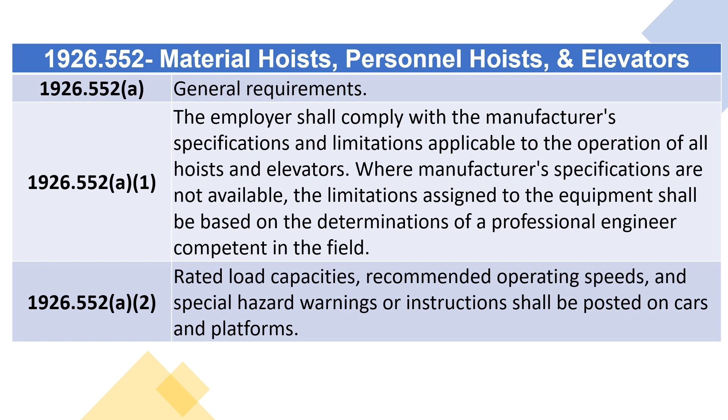1926.552(a)(2) Rated load capacities, recommended operating speeds, and special hazard warnings or instructions shall be posted on cars and platforms. 1926.552(a)(3) Wire rope shall be removed from service when any of the following conditions exists. 1926.552(a)(3)(i) through 1926.552(a)(3)(iv).

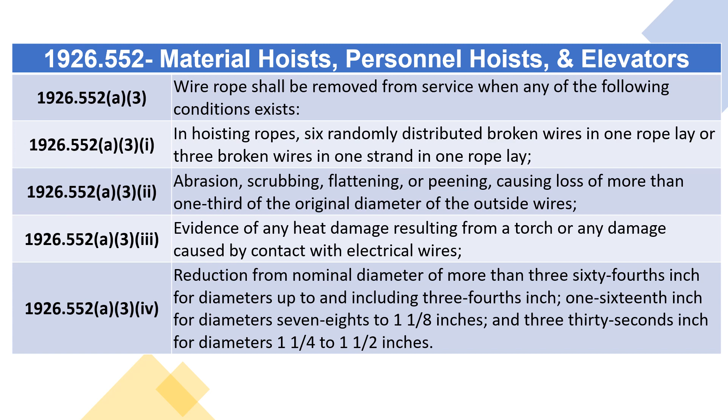In hoisting ropes, 6 randomly distributed broken wires in one rope lay or 3 broken wires in one strand in one rope lay. Abrasion, scrubbing, flattening, or peening, causing loss of more than 1/3 of the original diameter of the outside wires. Evidence of any heat damage resulting from a torch or any damage caused by contact with electrical wires. Reduction from nominal diameter of more than 3/64 inch for diameters up to and including 3/4 inch, 1/16 inch for diameters 7/8 to 1 1/8 inches, and 3/32 inch for diameters 1 1/4 to 1 1/2 inches.

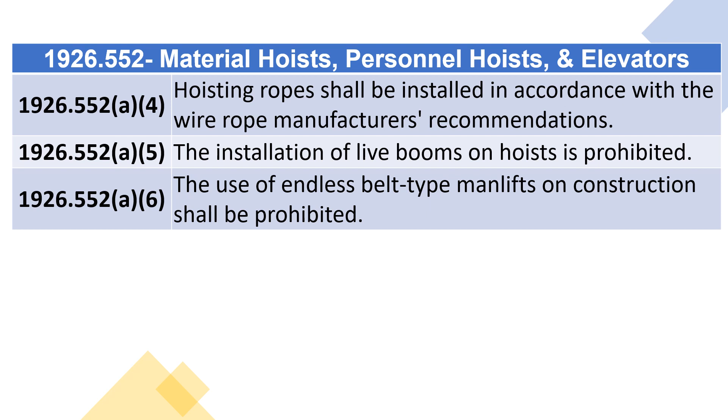1926.552(a)(4) Hoisting ropes shall be installed in accordance with the wire rope manufacturer's recommendations. 1926.552(a)(5) The installation of live booms on hoists is prohibited. 1926.552(a)(6) The use of endless belt-type man lifts on construction shall be prohibited. 1926.552(b) Material hoists. 1926.552(b)(1).

1926.552(b)(1)(i) Operating rules shall be established and posted at the operator's station of the hoist. Such rules shall include signal system and allowable line speed for various loads. Rules and notices shall be posted on the car frame or crosshead in a conspicuous location, including the statement "No riders allowed." 1926.552(b)(1)(ii) No person shall be allowed to ride on material hoists except for the purposes of inspection and maintenance.

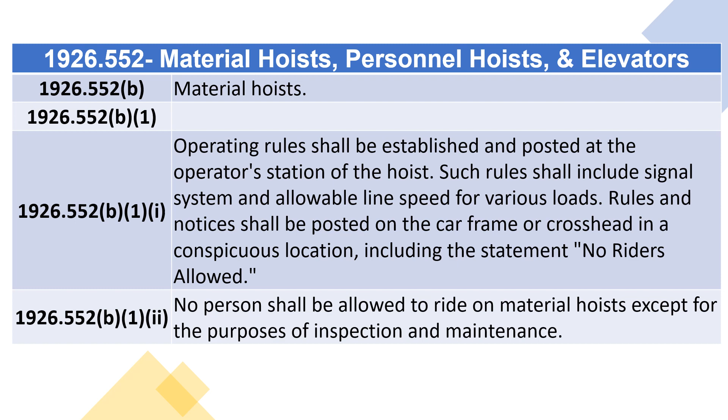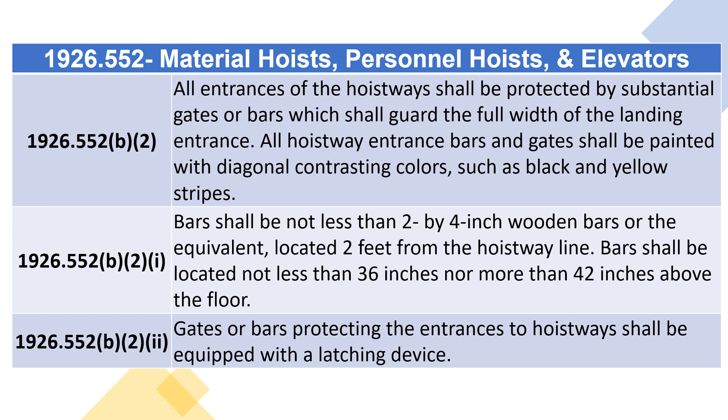1926.552(b)(2) All entrances of the hoistways shall be protected by substantial gates or bars which shall guard the full width of the landing entrance. All hoistway entrance bars and gates shall be painted with diagonal contrasting colors, such as black and yellow stripes. 1926.552(b)(2)(i) Bars shall be not less than 2 by 4 inch wooden bars or the equivalent, located 2 feet from the hoistway line. Bars shall be located not less than 36 inches nor more than 42 inches above the floor. 1926.552(b)(2)(ii) Gates or bars protecting the entrances to hoistways shall be equipped with a latching device.

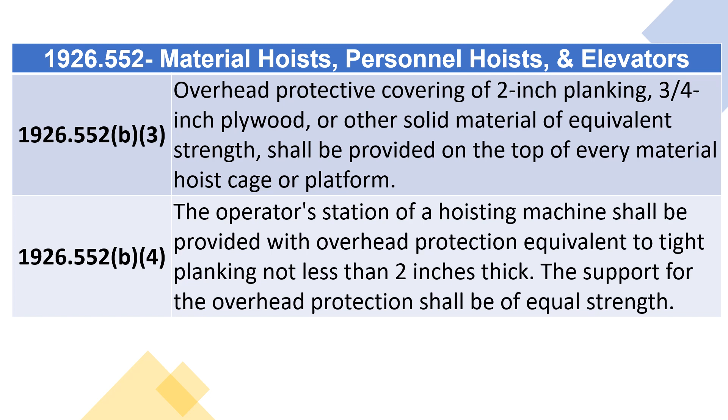1926.552(b)(3) Overhead protective covering of 2-inch planking, 3/4 inch plywood, or other solid material of equivalent strength, shall be provided on the top of every material hoist cage or platform. 1926.552(b)(4) The operator's station of a hoisting machine shall be provided with overhead protection equivalent to tight planking not less than 2 inches thick. The support for the overhead protection shall be of equal strength. 1926.552(b)(5) Hoist towers may be used with or without an enclosure on all sides. However, whichever alternative is chosen, the following applicable conditions shall be met.

1926.552(b)(5)(i) When a hoist tower is enclosed, it shall be enclosed on all sides for its entire height with a screen enclosure of 1/2 inch mesh, No. 18 U.S. Gauge wire or equivalent, except for landing access. 1926.552(b)(5)(ii) When a hoist tower is not enclosed, the hoist platform or car shall be totally enclosed, caged, on all sides for the full height between the floor and the overhead protective covering with 1/2 inch mesh of No. 14 U.S. Gauge wire or equivalent. The hoist platform enclosure shall include the required gates for loading and unloading. A 6-foot-high enclosure shall be provided on the unused sides of the hoist tower at ground level.

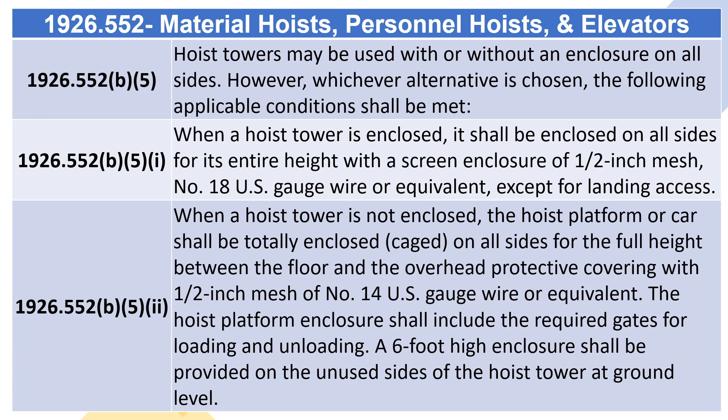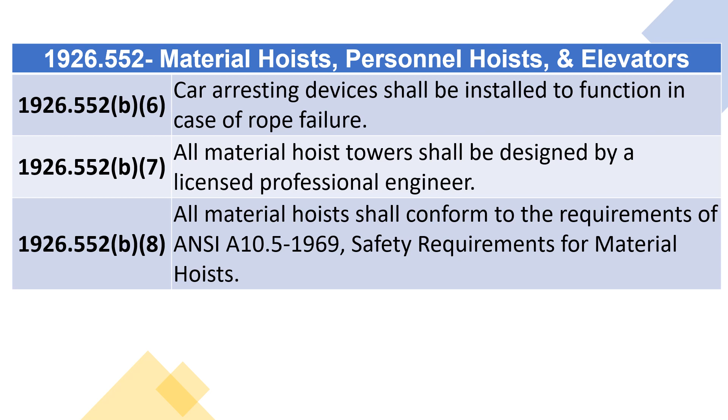1926.552(b)(6), car arresting devices shall be installed to function in case of rope failure. 1926.552(b)(7), all material hoist towers shall be designed by a licensed professional engineer. 1926.552(b)(8), all material hoists shall conform to the requirements of ANSI A10.5-1969, safety requirements for material hoists. 1926.552(c), personnel hoists.

1926.552(c)(1), hoist towers outside the structure shall be enclosed for the full height on the side or sides used for entrance and exit to the structure. At the lowest landing, the enclosure on the sides not used for exit or entrance to the structure shall be enclosed to a height of at least 10 feet. Other sides of the tower adjacent to floors or scaffold platforms shall be enclosed to a height of 10 feet above the level of such floors or scaffolds. 1926.552(c)(2), towers inside of structures shall be enclosed on all four sides throughout the full height.

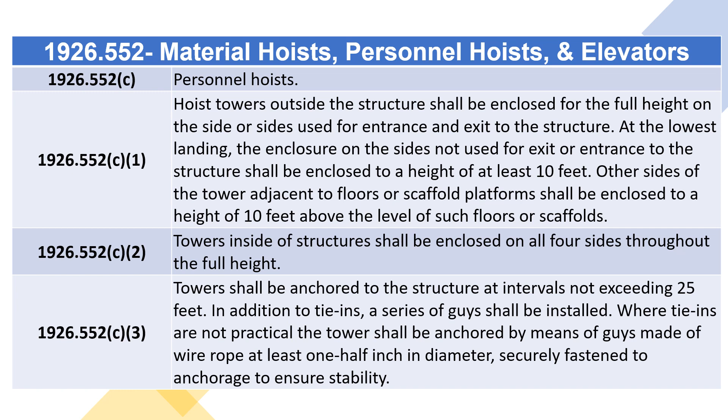1926.552(c)(3), towers shall be anchored to the structure at intervals not exceeding 25 feet. In addition to tie-ins, a series of guys shall be installed. Where tie-ins are not practical, the tower shall be anchored by means of guys made of wire rope at least 1/2 inch in diameter, securely fastened to anchorage to ensure stability. 1926.552(c)(4), hoistway doors or gates shall be not less than 6 feet 6 inches high and shall be provided with mechanical locks which cannot be operated from the landing side, and shall be accessible only to persons on the car.

1926.552(c)(5), cars shall be permanently enclosed on all sides and the top, except sides used for entrance and exit which have car gates or doors. 1926.552(c)(6), a door or gate shall be provided at each entrance to the car which shall protect the full width and height of the car entrance opening.

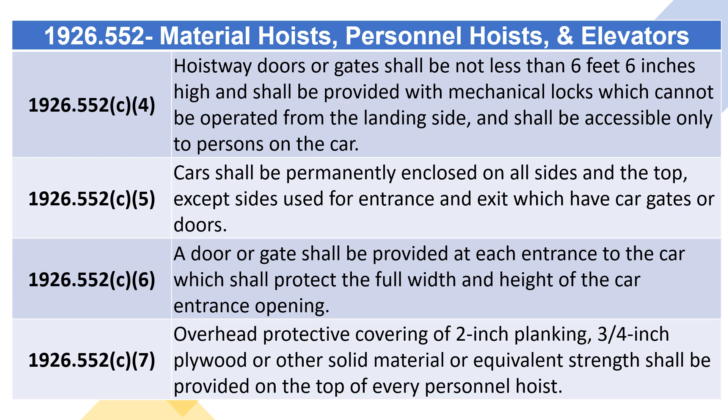1926.552(c)(7), overhead protective covering of 2-inch planking, 3/4 inch plywood or other solid material of equivalent strength shall be provided on the top of every personnel hoist. 1926.552(c)(8), doors or gates shall be provided with electric contacts which do not allow movement of the hoist when door or gate is open. 1926.552(c)(9), safeties shall be capable of stopping and holding the car and rated load when traveling at governor tripping speed.

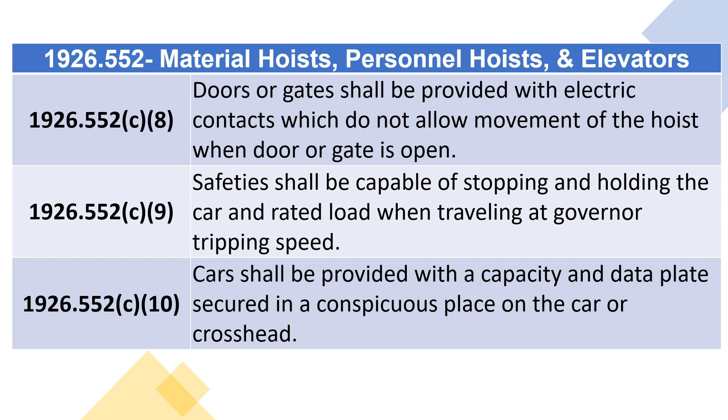1926.552(c)(10), cars shall be provided with a capacity and data plate secured in a conspicuous place on the car or crosshead. 1926.552(c)(11), internal combustion engines shall not be permitted for direct drive. 1926.552(c)(12), normal and final terminal stopping devices shall be provided. 1926.552(c)(13), an emergency stop switch shall be provided in the car and marked stop.

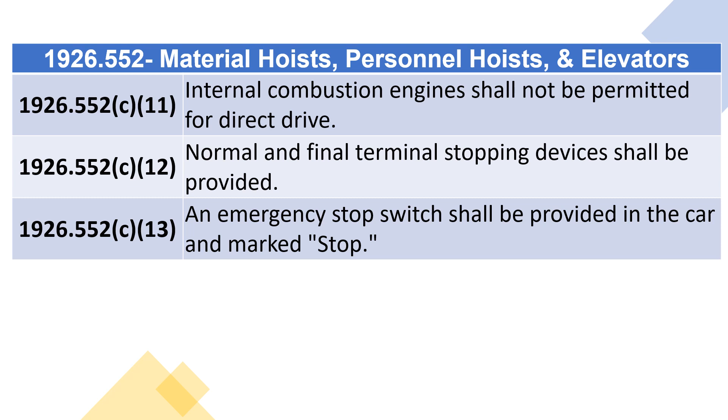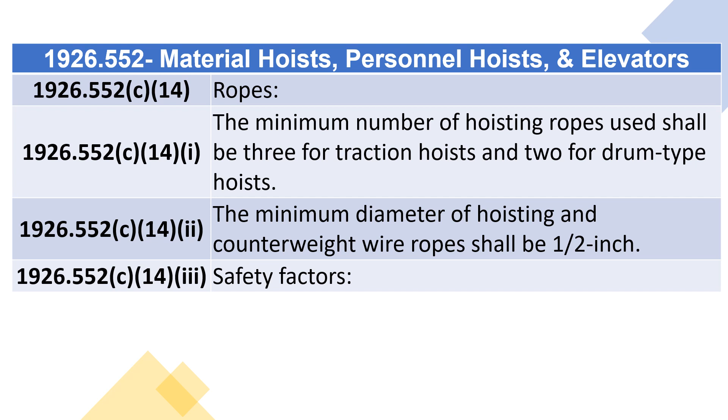1926.552(c)(14), ropes. 1926.552(c)(14)(i), the minimum number of hoisting ropes used shall be 3 for traction hoists and 2 for drum-type hoists. 1926.552(c)(14)(ii), the minimum diameter of hoisting and counterweight wire ropes shall be 1/2 inch. 1926.552(c)(14)(iii), safety factors. 50 feet per minute rope speed, 7.60 factor of safety. 75 feet per minute rope speed, 7.75 factor of safety.

100 feet per minute rope speed, 7.95 factor of safety. 150 feet per minute rope speed, 8.25 factor of safety. 175 feet per minute rope speed, 8.40 factor of safety. 200 feet per minute rope speed, 8.60 factor of safety. 225 feet per minute rope speed, 8.75 factor of safety. 250 feet per minute rope speed, 8.90 factor of safety. 300 feet per minute rope speed, 9.20 factor of safety.

350 feet per minute rope speed, 9.50 factor of safety. 400 feet per minute rope speed, 9.75 factor of safety. 450 feet per minute rope speed, 10.00 factor of safety. 500 feet per minute rope speed, 10.25 factor of safety. 550 feet per minute rope speed, 10.45 factor of safety. 600 feet per minute rope speed, 10.70 factor of safety.

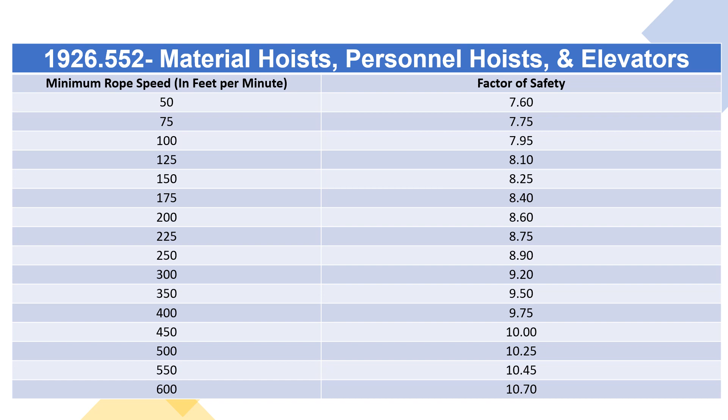1926.552(c)(15), following assembly and erection of hoists, and before being put in service, an inspection and test of all functions and safety devices shall be made under the supervision of a competent person. A similar inspection and test is required following major alteration of an existing installation. All hoists shall be inspected and tested at not more than 3-month intervals.

The employer shall prepare a certification record which includes the date the inspection and test of all functions and safety devices was performed, the signature of the person who performed the inspection and test, and a serial number, or other identifier, for the hoist that was inspected and tested. The most recent certification record shall be maintained on file.

1926.552(c)(16), all personnel hoists used by employees shall be constructed of materials and components which meet the specifications for materials, construction, safety devices, assembly, and structural integrity as stated in the American National Standard A10.4-1963, Safety Requirements for Workmen's Hoists. The requirements of this paragraph, (c)(16), do not apply to cantilever-type personnel hoists.

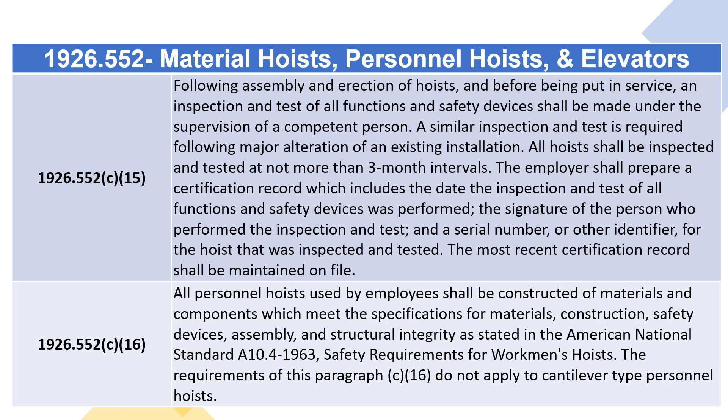1926.552(c)(17), 1926.552(c)(17)(i) through 1926.552(c)(17)(iv), personnel hoists used in bridge tower construction shall be approved by a registered professional engineer and erected under the supervision of a qualified engineer competent in this field.

When a hoist tower is not enclosed, the hoist platform or car shall be totally enclosed, caged, on all sides for the full height between the floor and the overhead protective covering with 3/4 inch mesh of No. 14 U.S. gauge wire or equivalent. The hoist platform enclosure shall include the required gates for loading and unloading. These hoists shall be inspected and maintained on a weekly basis.

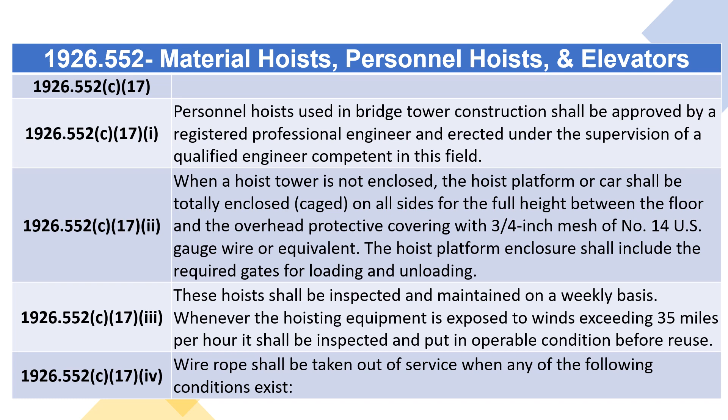Whenever the hoisting equipment is exposed to winds exceeding 35 miles per hour, it shall be inspected and put in operable condition before reuse. Wire rope shall be taken out of service when any of the following conditions exist. 1926.552(c)(17)(iv)(a) through 1926.552(c)(17)(iv)(e). In running ropes, 6 randomly distributed broken wires in one lay or 3 broken wires in one strand in one lay; wear of 1/3 the original diameter of outside individual wires.

Kinking, crushing, bird caging, or any other damage resulting in distortion of the rope structure. Evidence of any heat damage from any cause. Reductions from nominal diameter of more than 3/64 inch for diameters to and including 3/4 inch, 1/16 inch for diameters 7/8 inch to 1 1/8 inches inclusive, 3/32 inch for diameters 1 1/4 to 1 1/2 inches inclusive. In standing ropes, more than 2 broken wires in one lay in sections beyond end connections or more than 1 broken wire at an end connection.

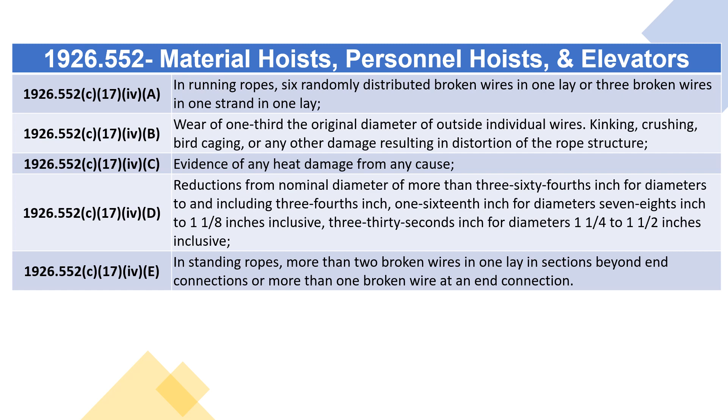1926.552(d), permanent elevators under the care and custody of the employer and used by employees for work covered by this Act shall comply with the requirements of American National Standards Institute A17.1-1965 with Addenda A17.1a 1967, A17.1b 1968, A17.1c 1969, A17.1d 1970, and inspected in accordance with A17.2-1960 with Addenda A17.2a 1965, A17.2b 1967.